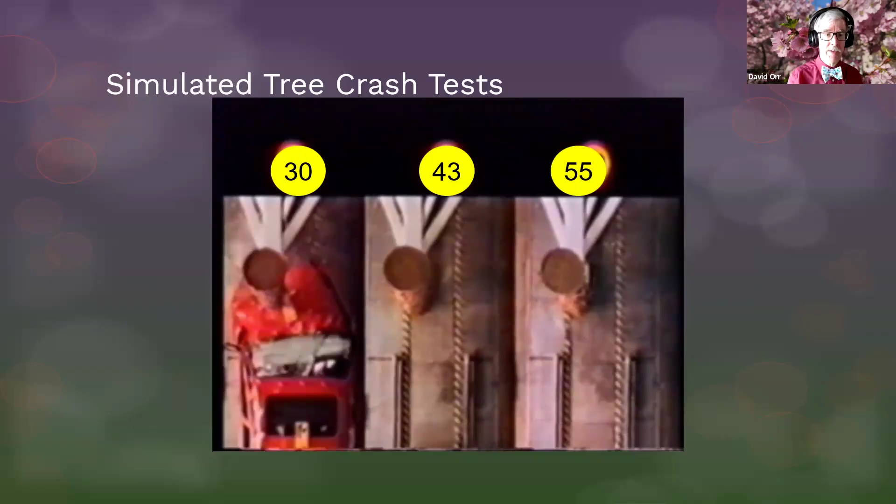Safe. And then, of course, a roadway departure could be somebody who leaves the lane. And for most of the two lanes, we worry a lot about this, where someone hits a fixed object. And of course, trees are one of the worst fixed objects, as we talked about in last week's webinars. Because if you hit a tree at 30 miles an hour, it's probably going to be a severe injury. But if you hit a tree at 43 or 55 miles an hour in the simulated test, you can see the tree is getting into the passenger compartment and is going to lead to probably a fatality, if not at least a serious injury that's life-changing.

Now, here in New York State, how many of those have we had over the last 6-7 years? Well, this is a plot of the data that's available from the Crash Location Engineering Analysis Repository. I think I got that right, CLEAR. But other databases out there, and you can see that the trend is relatively flat. I mean, we did have a bit of a dip last year. Hopefully that's the beginning of a new trend coming down, and that's our goal, and it's why we're talking with folks.

But it's still not where we'd like it to be. The goal really should be getting towards zero. And we don't want to see fatalities and serious injuries. And the roadway departure concept comes around because we want to keep the vehicle on the road, reduce the potential for the crash, and then minimize that severity, and then rinse and repeat at any site where we've got issues.

So in terms of keeping the vehicle on the road, we're going to talk about those proven countermeasures that are related to helping people stay essentially where they belong. Stripes, wider lanes, good signage, things like that. We're going to try to look at proven countermeasures that reduce the potential for a crash by having good clear zones, by having wide shoulders, good safety edge, things like that.

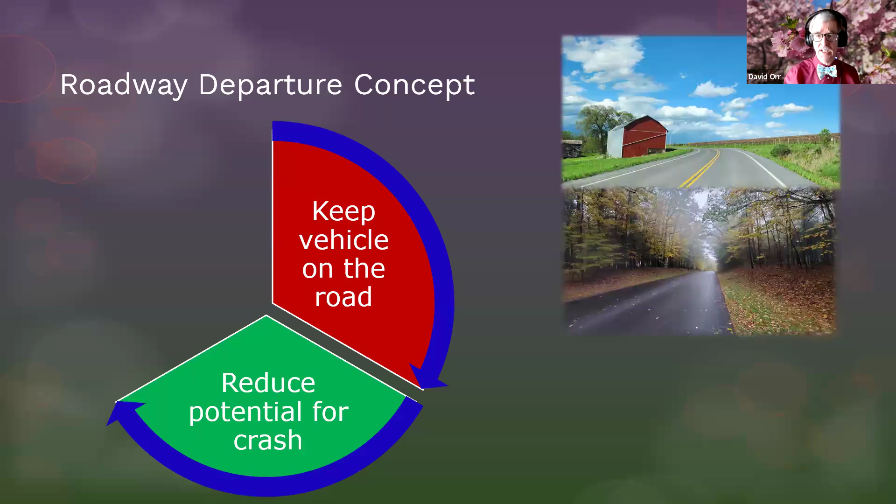And then, of course, if someone does get involved with a crash, we want to minimize the severity of that crash. So we want to use breakaway hardware and barriers and things like that. And there's overlap, of course. But the concept is keep people in the lane so they won't have a crash. If they have to have a crash, let's make it as minimum in terms of severity as possible.

Now, we've talked about this several times on webinars over the last few weeks, and we'll be mentioning this again. There is a call for projects right now, a roadway departure local call for projects from the State Department of Transportation. If you have any questions, please email them. Andrew Sattinger will help you out.

And let's see if Andrew's on the call today. Don't see him at first blush, but I might miss him. Sometimes the alphabetization isn't what I'd expect.

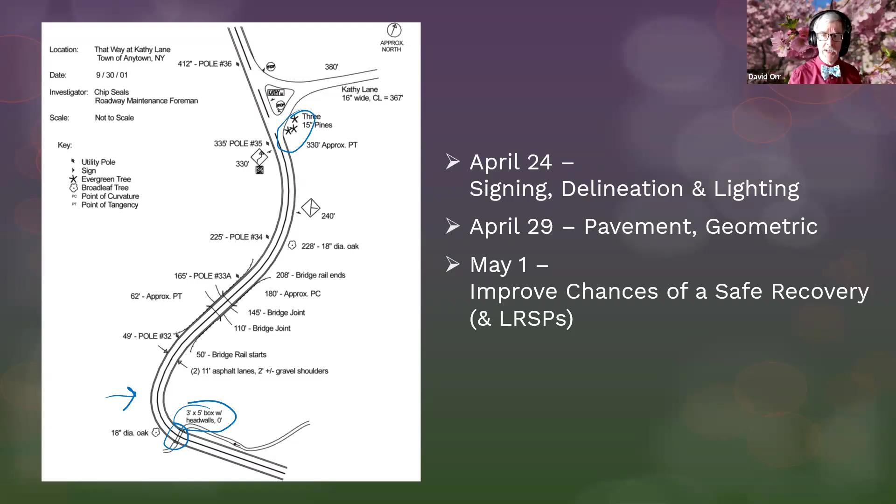Now, for each of these, I'm going to start with a couple of slides. The first slide will be on where this fits within the overall concept of the roadway departure issue. In other words, is it really focused on keeping the vehicle on the roadway, reducing the potential for the crash, or minimizing the severity? Though again, there's some overlap. And then what kind of crashes are they really focused on?

So if you have your crash information, you want to choose proven countermeasures to mitigate those particular problems, like head-on crashes, rollover crashes, or fixed objects, which are the three criteria for roadway departures we're talking about. And the state added a special criterion on nighttime crashes because we know a lot of severe crashes occur at nighttime. And then are we mainly focused on curves or tangents? Curves are a smaller percentage, but we know they have a higher fraction of the overall crashes, so they tend to be, in a systemic way, places we want to spend our money.

And then, of course, we're going to focus on whether these are primary, in other words, the ones we want to do first, or ones you might want to consider if you're out there doing safety improvements anyway, and those will be highlighted. So we'll start with the first one, which is markings, and there actually are two that are listed in the Roadway Departure Safety Action Plan appendices and in the call for funds, but I'm going to combine them together, and that's center line and edge line markings.

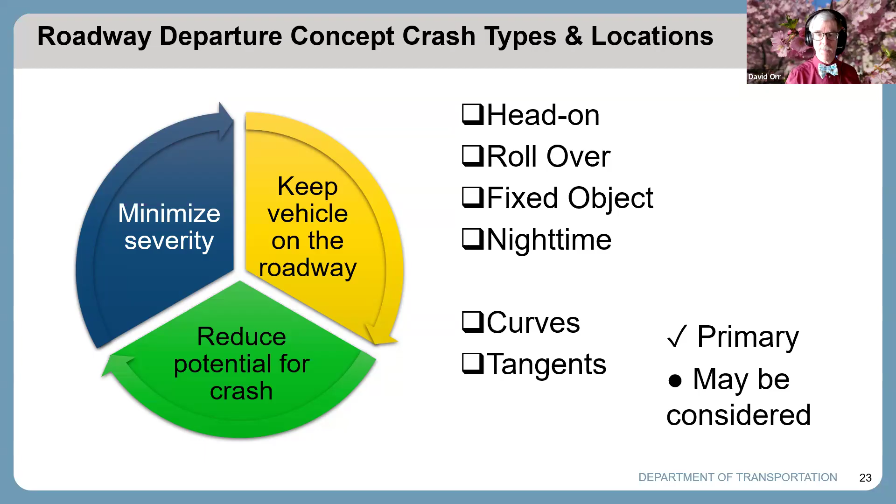So with center line markings, we're dealing with trying to keep the vehicle on the roadway. We know they're high priorities for head-on because we keep people in the lane. They're really good at night, okay? But even during the day, they can have some value. And of course, we're not as worried about the roadway departures, but they're good on both curves and on tangents. Makes sense.

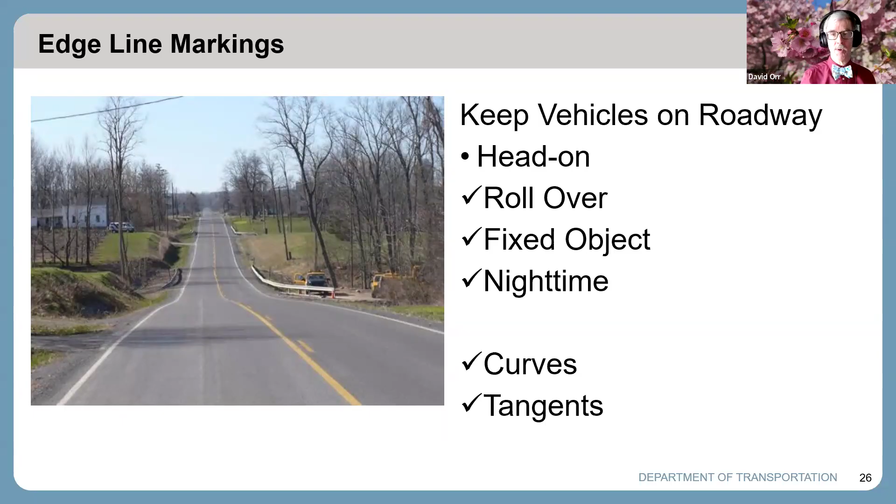Edge lines, take that same road. We're not as worried about the head-ons with an edge line, but we certainly are worried about rollovers and fixed objects, and of course, just like with center lines, good for curves and for tangents. So together, pavement markings are a proven countermeasure. Now, the FHWA's proven countermeasure is a little different. We'll talk about that in a sec, but we know markings really do help.

However, once you decide to put the markings down, do you have the funds to maintain them? Because even if you go through and you do a grant under this call for funds to get started, you've got to then have the maintenance cost to maintain those into the future, okay?

And the visual value of lines, we know that. So, electronically, we've removed the lines on this road, and it's a lot harder to see where the edge of the road is. It's a lot harder to see where the center line is, more chances of a crash. So that's why, especially as the traffic goes up, we want to put in markings, okay? We know markings help, and even these markings, which were getting a little faded, really valuable.

And for me, lines are most valuable at twilight, okay? Even these lines, which again, you can tell they're a little faded. It has been wet, so there's a little water. Boy, do they really stand out. They really help me driving at the twilight period because that to me is one of the hardest times to drive. So pavement markings we know really help.

Now, in terms of the Manual on Uniform Traffic Control Devices, the MUTCD, the new one, which is federal plus the state supplement, and yes, the state is working on some updates, and I'll talk about a couple of those in a sec. There are some requirements that exist for putting markings down, okay? So for yellow center lines, it is a standard. In other words, it's a shall, you shall do it.

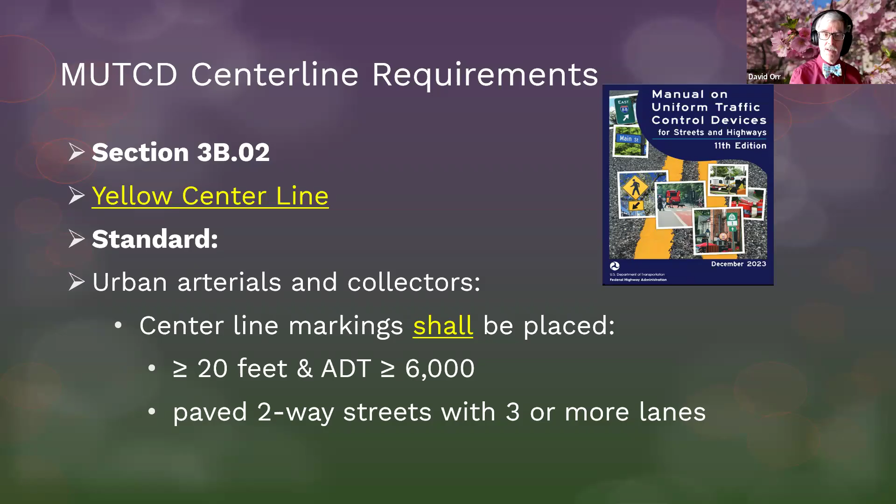You need yellow center lines essentially on the interstate, of course, but any urban arterials and collectors, okay, that are greater than 20 feet wide with a traffic of over 6,000, okay? And any road that's got 3 or more lanes that's paved. Yeah, 3-lane gravel, that would be weird, but that's what it says. In terms of shoulds, i.e. guidance, you need to do it when the traffic is over 4,000, and even on rural systems, you should be doing it if it's over 18 feet, or there's over 3,000 vehicles per day, okay?

So let's just see, I'm going to make you all work now. My hands are up. Go down to the lower left, raise your hand if you've got roads that meet those criteria. Let's see what y'all think. How many of you have roads that meet those criteria?

Yeah. So if it's a shall, you need to do it. If it's a should, you have to document why you're not doing it. And that's not going to be an easy thing to do because we know it really does improve traffic safety. And of course, you may need to do it anyway, and watch the hands all go down. If there's an engineering study that indicates a need, you should be doing it as well. So if you're out there doing a study and, hey, my local road safety plan says we need stripes, you need to think about putting the stripes in.

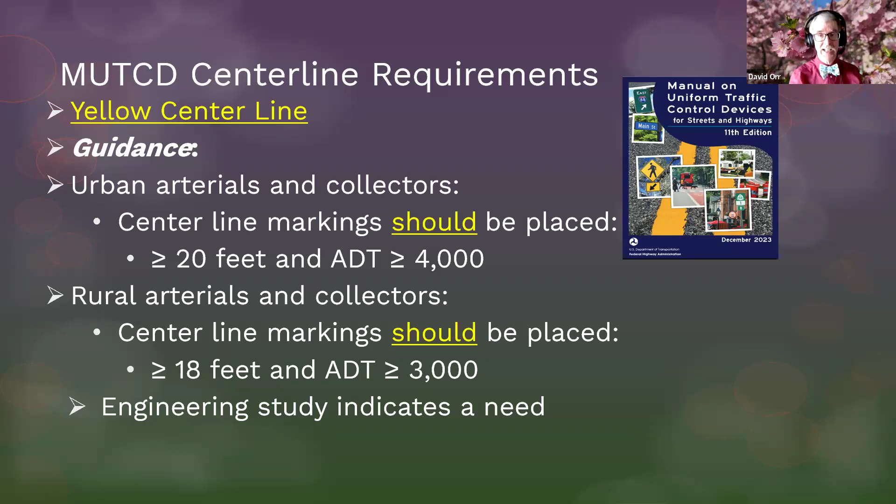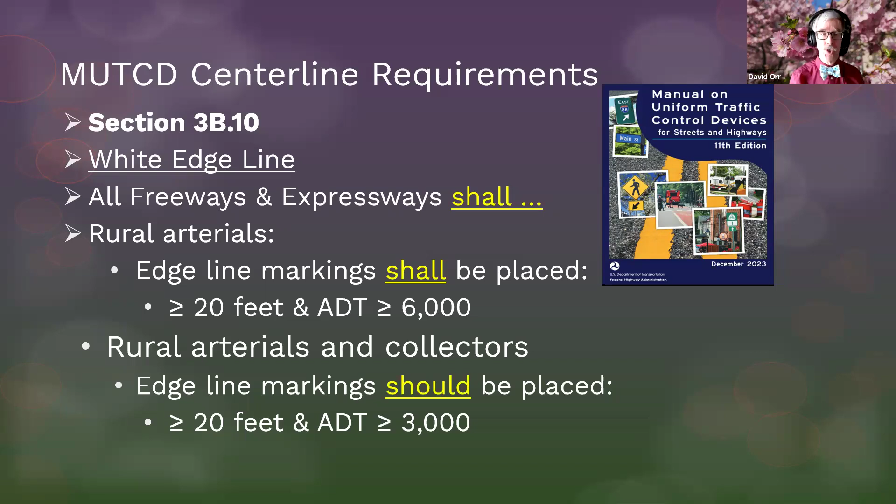Now, for the edge line, again, freeways and expressways shall have them, but also rural arterials over 20 feet, over 6,000, it's a shall, and edge lines, it's a should. Okay, so these are the standards in the MUTCD, and if you're not sure whether you have an arterial or collector, I would go to the New York State DOT's functional classification viewer and look it up. Now, you may want to look at whether those roads should stay in those functional classifications. We haven't really updated those as much as we probably should. So you may want to think about doing that. But for now, we're using those as requirements from the MUTCD.

Now, in the case of the Federal Highway Administration, their proven countermeasure for lines has to do with wider edge lines. Okay, there's actually very good evidence that they improve safety. So I'm going to introduce you to something called the Crash Modification Factors Clearinghouse, or CMF Clearinghouse. And the idea is there's a website you can go to, and I checked, it's still active and working, where you can actually look at the expected crash reduction when you add a feature.

Okay? In this particular case, going from a 4-inch to a 6-inch wide line. And what they found when they did that was a crash modification factor of about 0.78, i.e., you get a reduction of about 22% in the number of crashes you would expect on a particular roadway by going from a 4-inch to a 6-inch line.

So if you've got a place with more crashes than you'd like, maybe you think about widening those lines up. Okay? And you could widen up the center lines as well if you have the space. And of course, that's going to be something you have to think about.

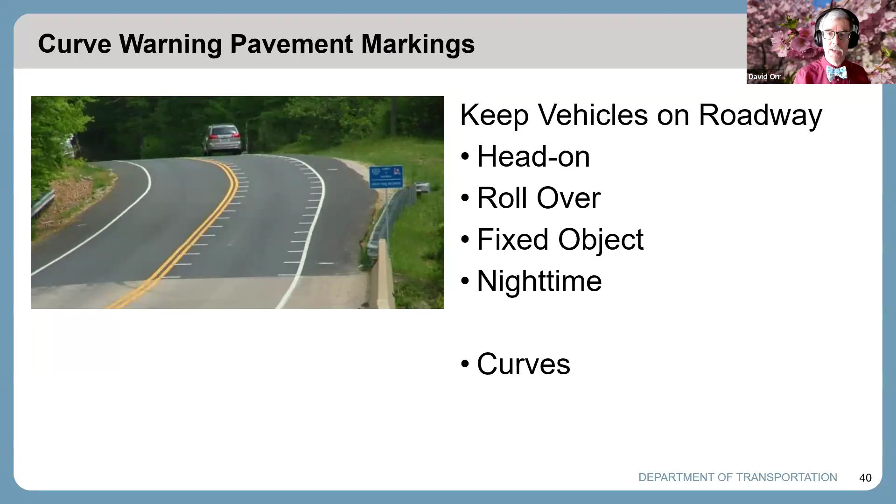A couple of other proven countermeasures that are out there. There's some pavement markings that you can add to the pavements that'll help. They're not the highest priority. The lines are the highest priority, but if you've got specific locations where you've got issues, you can put markings down. It could be an in-lane pavement marking, such as the words. You just actually put the words that would be on the signs. Curve 45 miles per hour. You put them in the order to drive over them.

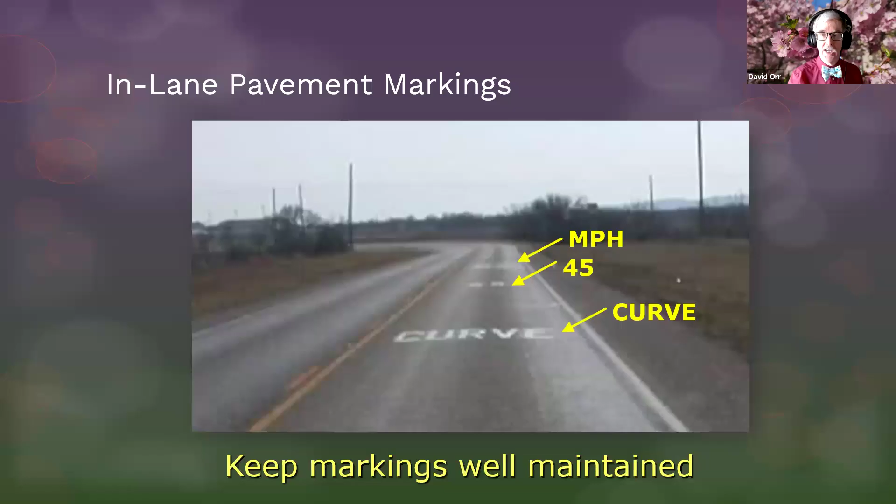Here's the key, though. Again, you got to maintain them, and you got to be careful. They can create some slipperiness issues, so make sure you think about that. In Pennsylvania, they did a study, and they found about a 1/3, 33% reduction in the number of crashes on certain key curves. Don't put them on every curve, okay?

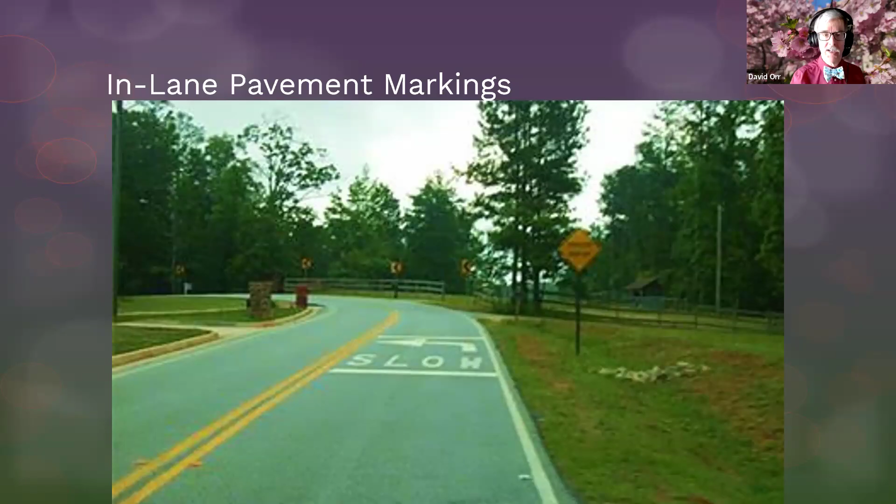And there are standards out there, and specifically standards for the optical speed bars. This concept is you put these little bars into the roadway, and it makes the curve look sharper than it really is, okay? You don't have to go in as far as you'd think. It sort of keeps people in their lane.

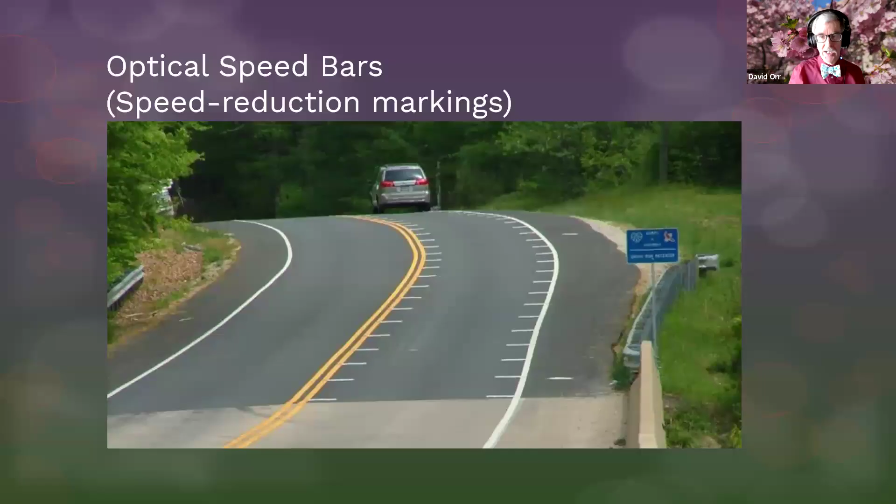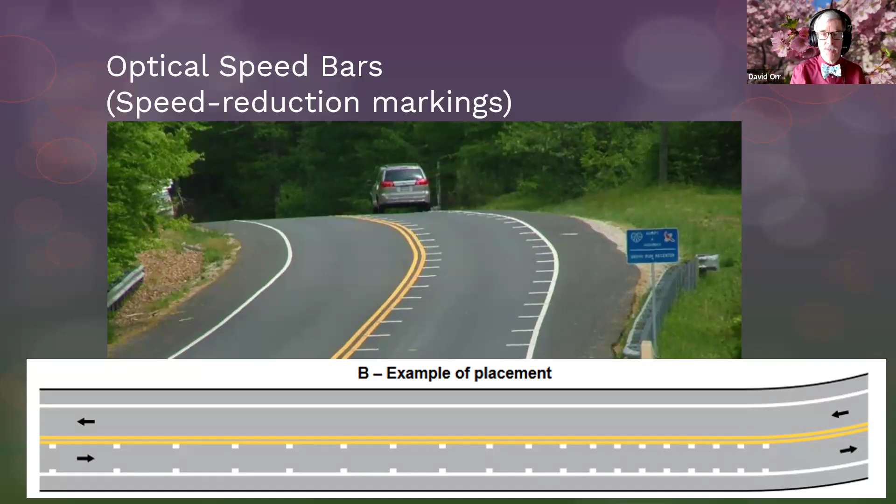And there are actually standards in the new MUTCD on how to put the markings, and they're really talking about the markings before the curve, though some of the research actually says you may want to continue them into the curve, especially if it's not a constant radius. But the idea is you tighten them up, makes them look sharper than they are, and you slow people down, okay? So what would be a good location for optical speed bars?

I'll let you type in your answers, and then I'm going to show them. In this case, we're not letting you all see everybody else's answers. I'm going to give you 15, 20 seconds, type in your answer, and then we'll see what everybody else is answering here in just a sec. Okay, let's see what y'all come up with. Okay, let's go down here and let's see what y'all have for responses.

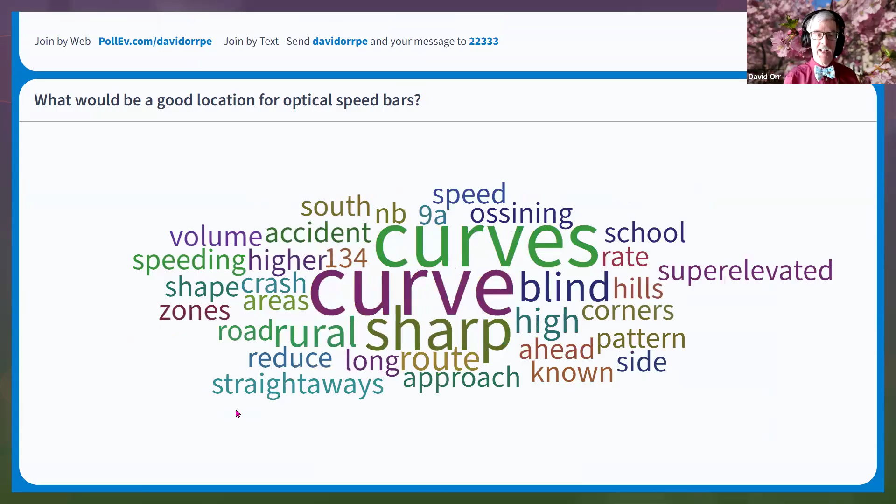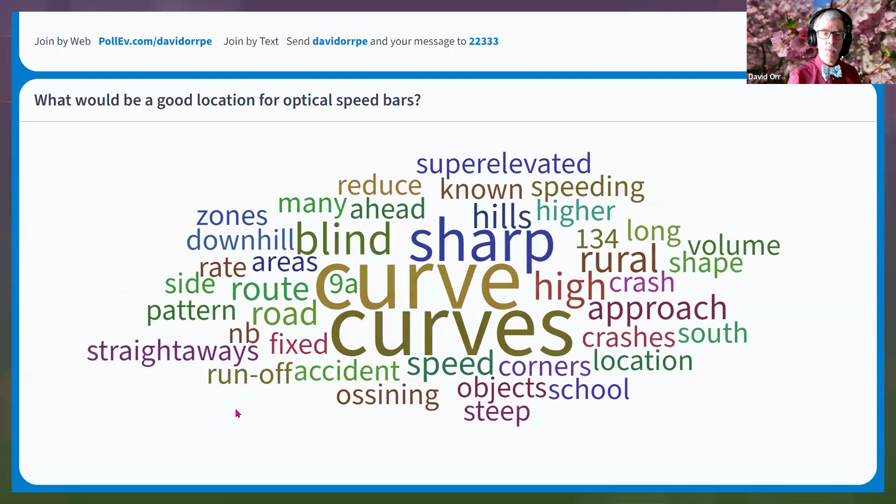Yeah, sharp, blind, high-speed curves. You've got a lot of accidents. You might have some specific places you're thinking about. Again, something to think about, but once you do it, can you maintain it? Okay, so it's something to keep in mind. And yeah, spiral curves might be a place where you might want to have them because people may not be used to spiral curves.

Now, one that's available, it's listed in the Roadway Departure Safety Action Plan for urban interstates, but it is something you might want to think about. And the idea is you do a grooved in retroreflective marking. In other words, you put your stripes in a groove to protect them from snowplow damage. Again, it's not the highest priority. The first thing is the stripes, but it's a way to make the lines last a little bit longer. And they're really, of course, good at nighttime, primarily on the tangents.

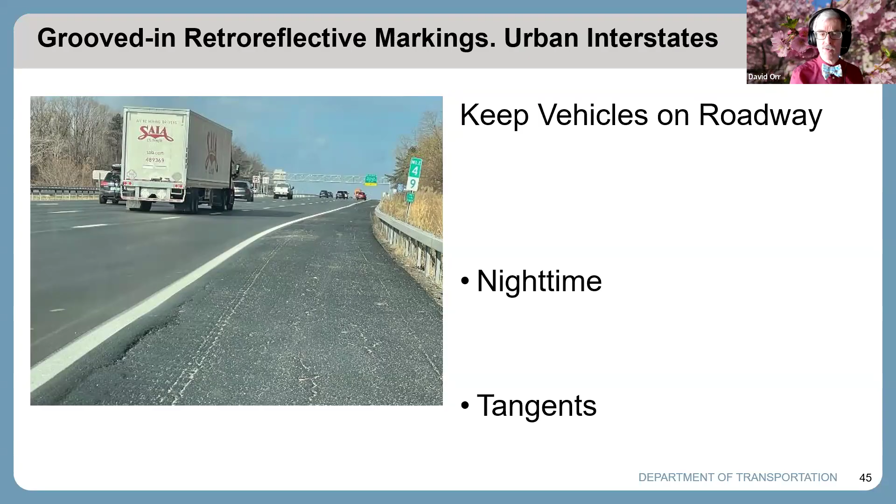Now, I don't have a great picture that shows a close-up of this, but I have one I got from Minnesota DOT putting in what are called mumble strips. They're much thinner. So just to illustrate the concept in your head, you put in a thin groove and you put the lines in the thin groove. Okay? The groove itself is only about 1/10 of an inch deep. Then when you put your 20 mil spheres in there, the plows don't wear them off.

And the research has found they last about 5 years the first time you put them down, but when you start reapplying, they build up thickness, they don't hold as well. So by the time you get to the third cycle, you're not getting as long a life compared, we're assuming markings that would be worn off a year normally. So you can get 10 years with 3 applications, that's pretty good, and they stay in really good shape for that period of time. And then you'll have to think about either regrooving things or fixing them up from there.

New York State Thruway is doing it, states are doing it in a lot of locations. And again, something you might want to think about adding to your bag of tricks. Now, another one that is a major emphasis area within the Roadway Departure Safety Action Plan is to make sure your signs are compliant with the MUTCD. It's a high priority activity. It's good for all your curves. And we're going to spend probably more of the time of this particular webinar on this because it's such a high priority. And again, this comes from the MUTCD.

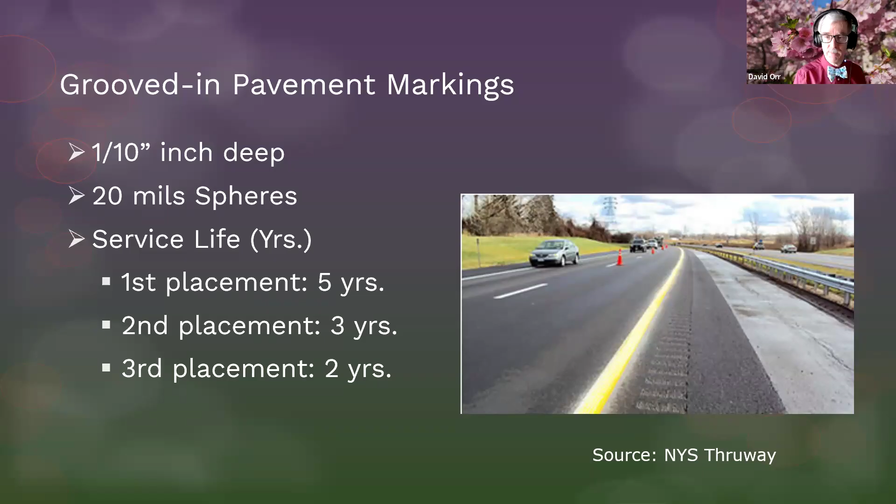So when we're talking about curve signs, somebody asked a great question. I'll go ahead and answer that now. I'll go back real quick. Do the grooves trap water, reducing the life cycle of the pavement? That is a concern. You do have to be careful about your drainage when you groove them in. You may even have to put some drainage spots. It usually isn't a major problem, but you're going to have the same kind of concern you'd have for rumble strips in some respects. But we'll talk about that when we talk about rumble strips.

So in terms of the curve signs, the advisory speed, obviously, if it's a sharp corner, it's going to be a turn sign versus a flatter one where you might have a curve sign. And with 2 or more curves, you'd have the reverse turn or reverse curve. The new MUTCD has changed this slightly. In the old MUTCD, it was one or the other. Speed was 30 or less, you chose the turn. Otherwise, you chose the curve sign. The current standard has changed to say you always put up at least the curve sign and you think about the turn sign. It's a should condition if it's 30 or less.

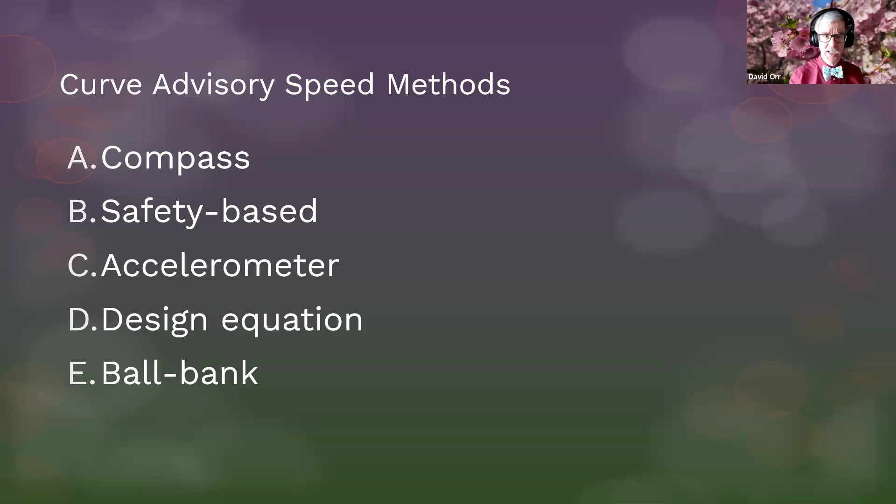But if you've got any dips or dives, you don't have great superelevation transitions, or there's something odd about the alignment, doesn't quite stay up like you'd expect, I really am a big fan of a direct measurement method, either with a ball bank or an accelerometer. You may have heard of the Rieker system, the state's using that. That's an accelerometer-based system. The ball bank is probably the one most of us are familiar with.

And this is exactly why we're actually doing one special webinar specifically on the use of the ball bank to determine the proper advisory speed for curves. We're going to be doing that on May 6th, so essentially 2 weeks from today, specifically on how to use the ball bank, some lessons learned to help everybody out in terms of doing a good job in your curve signage. Okay? So hopefully this will help you out.

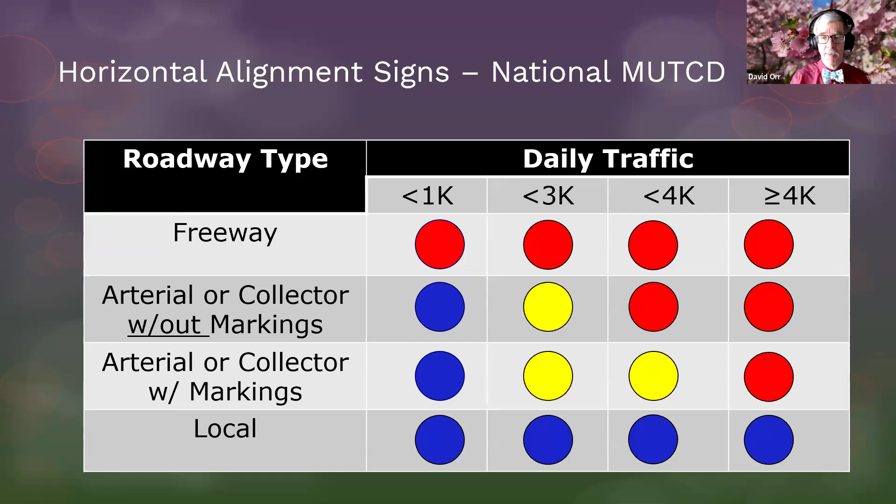So in New York State, essentially if the traffic is low enough and you're on arterials or collectors, you may put one up. Okay? If the traffic is 1,000 to 3,000, you got the yellow. The yellow means you should do it. Okay? So again, they'll write this up when they actually do the table. So that'll be a should condition, the yellow. And then the red means you shall do it. So if you've got roads over 4,000 vehicles a day, then you shall put up horizontal alignment signs. Okay? And again, for local roads, it's always a may condition.

That's the blue. But I'll tell you right now, I think from the standpoint of the public, you may still want to think about putting those signs up when you get higher traffic volumes. So again, how do we determine this? Well, again, go to your arterials and collectors, figure that out from the functional classification viewer. And then there's also a traffic data viewer. If you don't have traffic counts, you can go and see if the state's done some traffic counts. And for a lot of the arterials and collectors, they have. And if you have a bridge or a roadway, they've done a count. So you can get a traffic count.

In this particular case, I chose a road over in the Buffalo area because that's where my figure was from the functional classification viewer. And I looked at the data, and you can actually look at the data and see that it was in the range of about 3,000 vehicles a day, though it used to be about 4,000, which leads to an interesting question when you go back and look at the table. If it's traffic that's fluctuating between 3,800 and 4,200, does it fall under the should category or the shall category? Myself, if it's close, I'm going to put those signs up.

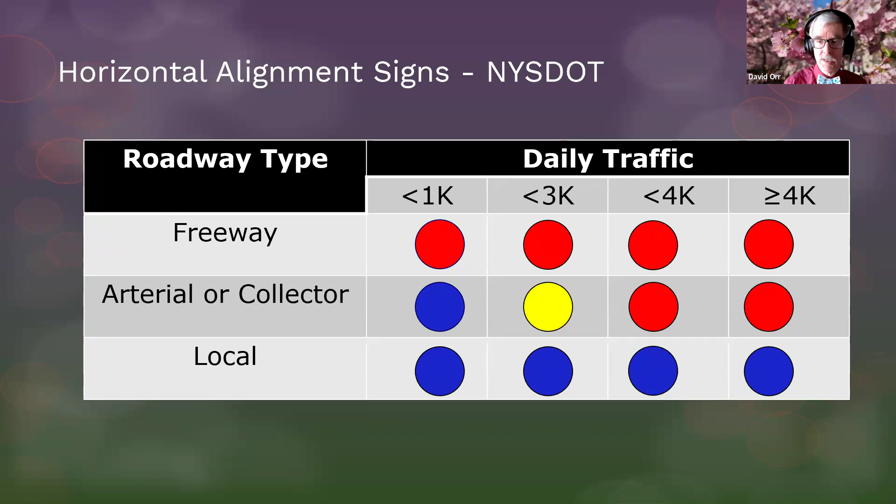Okay. Now, once you decide to put a sign up, even if you're in that may zone, even if you're on a local road, once you decide to put that sign up, there are some requirements. Again, the National MUTCD says you can have markings or an advanced sign if you're not slowing down the speed much, if you're going from 40 to 35, for instance. But again, New York State has said those markings could get covered by snow, could get worn off. So signs are the V&T, the Vehicle and Traffic Law, priority anyway.

So in New York State, if you're dropping the speed at all, you have to have the advanced sign. Okay? You have to have that plaque. So you really need to put that out there. If it's dropping the speed by 15 miles an hour or more, you need to have signs and delineators. State DOT is going to use chevrons in every single case with 15 or more, but at least currently, their thinking is they'll let you still use delineators at 15 miles an hour. But again, that's something you need to think about what you're putting up.

And when it comes to delineation for curves, delineation is a proven safety countermeasure for roadway departures. Because if you're not familiar with a curve, you don't know how sharp it is. An advanced sign can help you, but the delineation can really do a huge improvement. Okay? And you can add the lollipop stripes on the delineators for certain critical curves. But the key is to make sure you know what the curve looks like.

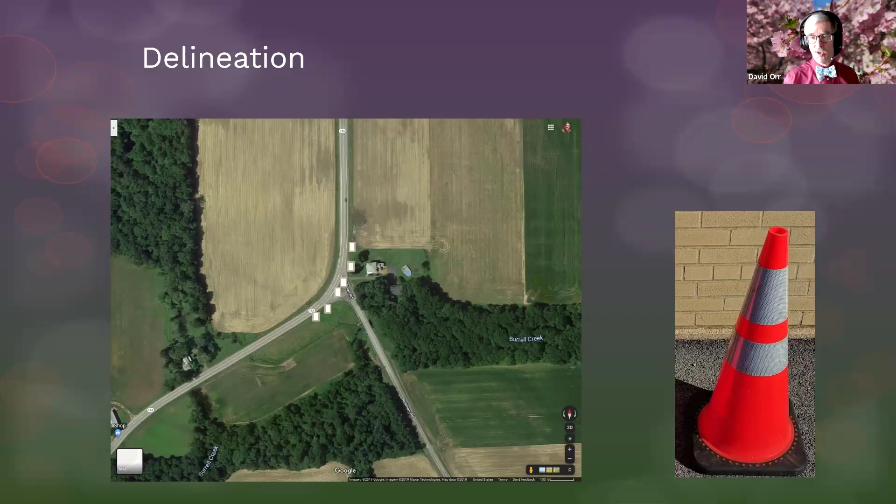So you put your delineators up, and then you've got to know exactly where you want to drive your post, and you can call 811 before you do that, okay? So let's just see if you remember what I just said. And this time I'm going to give you a few seconds to do this one.

And yep, you got it. Very good. Three is a minimum. Four is great. I'm okay with four, but minimum of three that you've got there. Okay. Again, that helps define the curve. And you can always tighten it up. I'm okay with tightening it up, but minimum of three at all times.

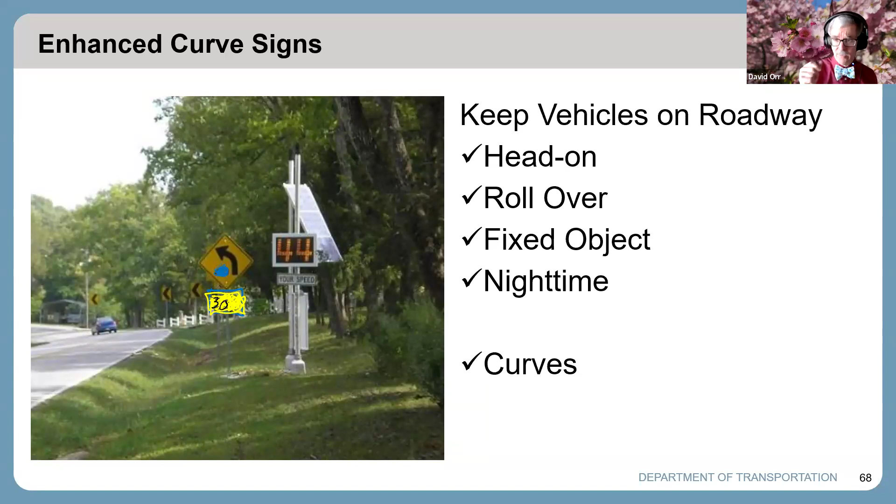So essentially, what you need to have is the advance sign, okay? I know it's going to be bright yellow rather than that, but it's the advance sign with whatever the speed was, and that would actually go pretty far back. Obviously, this isn't the proper location, but I just want you to realize that's the one I want to give you. I want you to think about what else is wrong in terms of this curve sign.

But there's things you can do. You can enhance curve signs, and everybody thinks this is what they mean: you're going to put up a big sign that's electrified and blinks to warn people. Might even be dynamic, which we'll talk about in just a second. But enhanced warning signs for curves could be just like you have advance signs for stop signs, where you put them on both sides of the roadway. You double the signs up. You make them bigger. Enhancing it, we know, reduces the number of crashes.

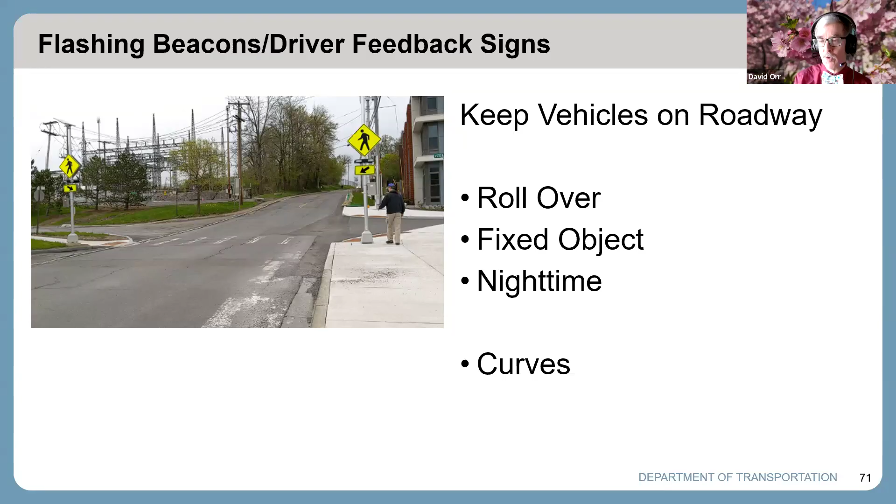Okay? And then someone asked a question, and this is perfect. We're going to talk about driver feedback and flashing beacon signs. There are lots of them out there. Now, the video that I've got for this of me walking across the road is for more of an intersection safety problem, and we're focused on roadway departures right now. So let's talk about some dynamic signs that are out there. And again, this is a proven item, okay?

So what you'd have to have, though, is something that detects people's speeds, radar, lidar, something like that. And then you have to flash and give them information. I actually am not a fan of the speed too fast for curve text. It is allowed, but I like to give them a number instead. So speed too fast for curve, maybe tell them what the curve speed should be. Okay, but again, be careful with too much text. But the idea is a dynamic sign. And there are videos and stuff out there.

And let's see if this one's going to show. Yeah, I'm gonna get rid of the sound for this one, just realizing it might not go through everybody's.

But you can see the blinking signs. Some of them are dynamic, where they actually react when a vehicle comes and they turn off when the vehicle's not coming by. Okay, so there are enhanced signs that you can put up, and those advance signs can really help improve safety by quite a bit. Okay, so there's a speed dynamic. There's one that says slow down that highlights again when people are going too fast. And then the one on the right we've already seen. Okay. So let's talk about this a little bit.

Let me look at your questions. I'm going to put the next slide up there. How do you handle the speed feedback sign next to the advisory speed? Well, again, these signs were spaced too close together. They really should have been spaced further apart. There's something we call primacy. And the idea behind primacy is you space your signs out so people have time to read and react. You want to give them about 4 to 5 seconds between them.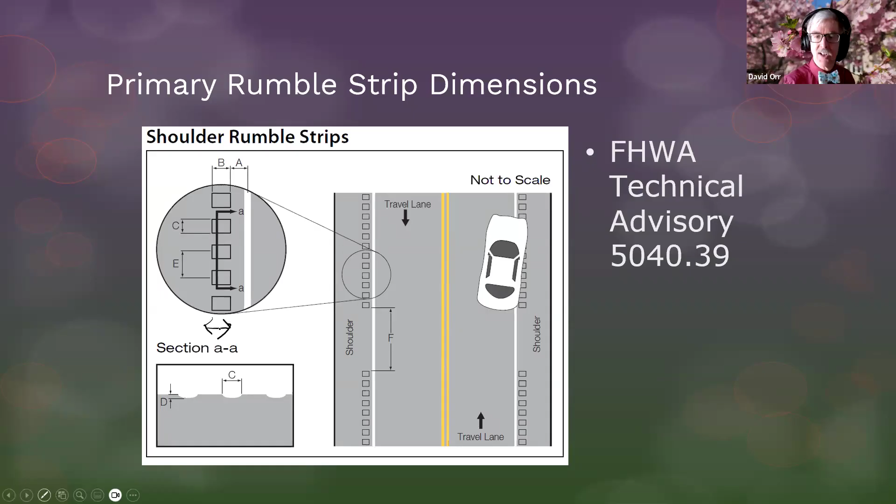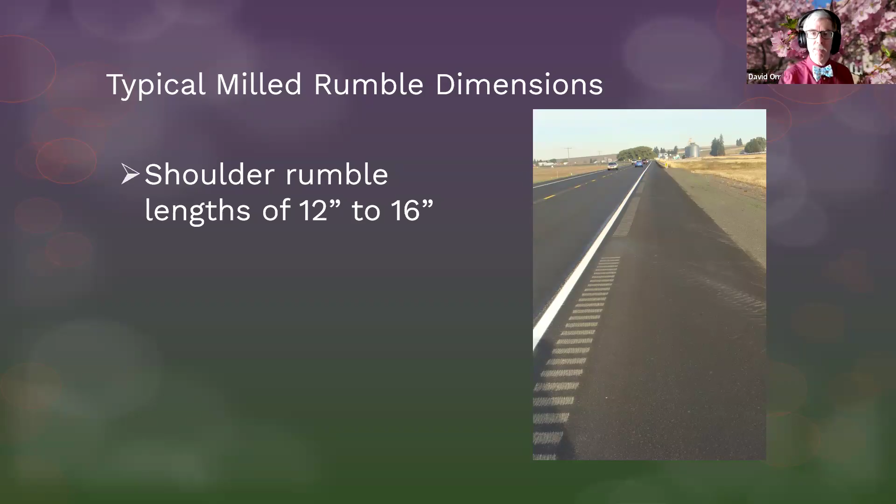So essentially, it's this dimension here, laterally. Okay, that's the length they're talking about. Okay. Now, what do they mean by that? Well, essentially, most shoulder rumbles are 12 to 16 inches long. In other words, what you and I would think of as the width. Okay. You might just put one right next to the edge line down to 8 to 12 inches.

Heck, they've even put in 4 to 6 inch installations when you've got limited space. They may not be as effective, but again, they can still help. So it's something you might want to think about if you've got limited space and you think rumbles might help you. It could be very, very useful.

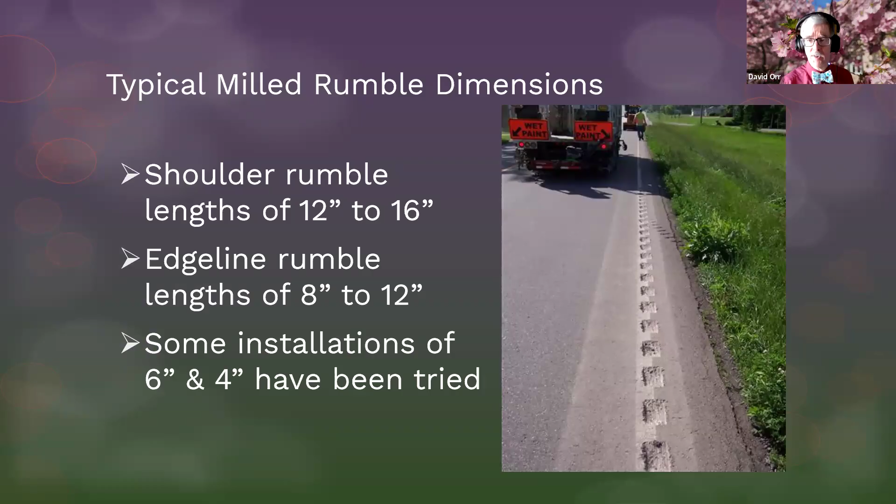Okay. Some agencies actually purposely put the rumble strip on the edge line. The center line's already always done, but the edge line right where they're putting the rumble, and they're called stripes. Okay, and they usually highlight the E, enhanced. I don't know, maybe that's what the E stands for. But you can see that vertical face actually keeps the beads lasting a little bit longer. You still have the exact same problems that you might have in terms of pavement or water, but that can be helpful to add to it.